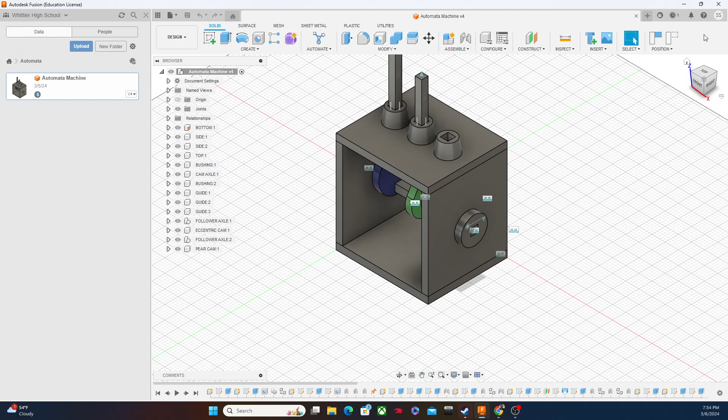Okay guys, so you have your automata all done, hopefully. Once you're done, if you need to rotate it on its own, here's how you do it: go to joints and find the one with the revolute that you did, right click and say animate joint relationships, and it should run like that.

Okay, now let's go ahead and stop that. I think you just right click here and say cancel.

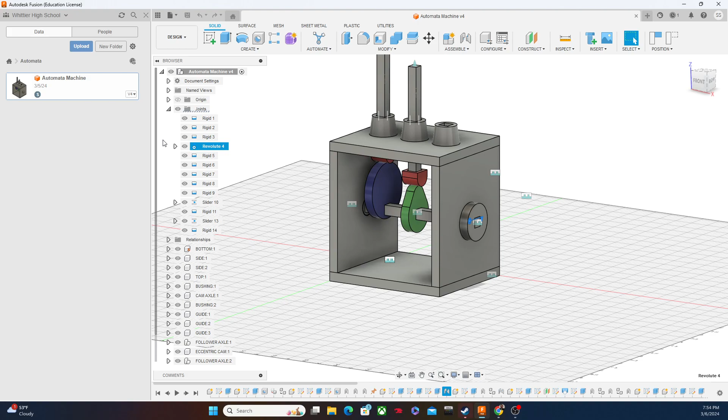We're gonna make this handle, and we're gonna make a bushing as well. Technically they're both the same, right? They're both bushings, but we're going to make one handle and one bushing. Also, you don't have to have a hole right here for the wood—you see the hole right here? You do have to have a hole, but it doesn't need to show. So you could actually cap this off so you don't see the wood, if you want it a little nicer, which is kind of cool.

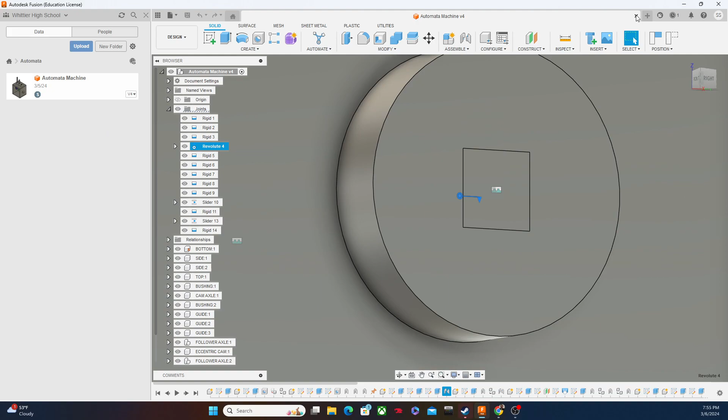So I'm going to go ahead and close out of here, and we can build it on our own over here, and I'll give you the main dimensions. The first thing you want to do is go to design and click design—oh, we're actually in one right now, I just noticed. Go ahead and start somewhere.

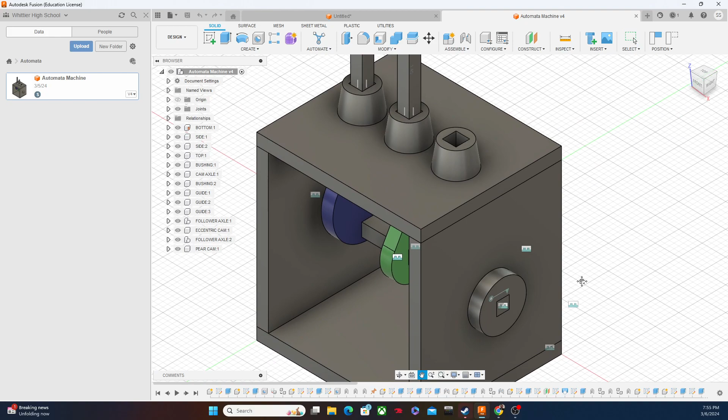Let's say here. The cool thing is that this, which is just a boring circle, could be anything. It could be a heart, a hexagon, a triangle, a logo like a Nike swoosh shape, whatever. In fact the Nike swoosh would be cool because it goes like this, and you can put a handle coming out one side that you're twisting. I don't know, but what I'm saying is it could be a face of a character, whatever you want.

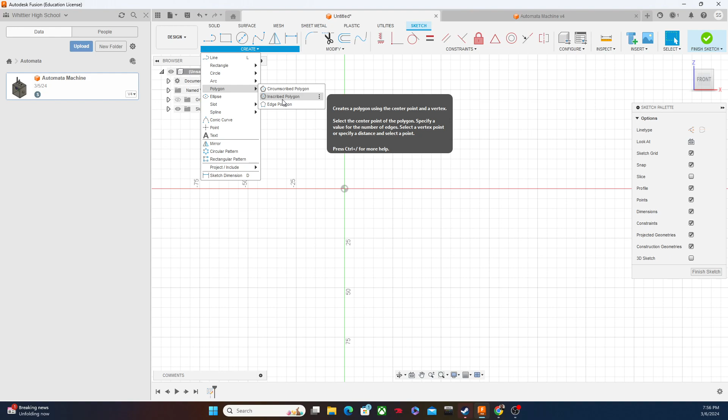Basically, however you do the outside—I'll just do a polygon for now, so that's really easy. I think this is the one I want. I'll just click here, and there we go. I'll do a six-sided one for now.

Make sure the size is generally the size you're looking for. Right now I'm going to push enter because I'm in millimeters, so let's get that converted over, since this assignment we're mostly working on inches. So let's click that and go to inches.

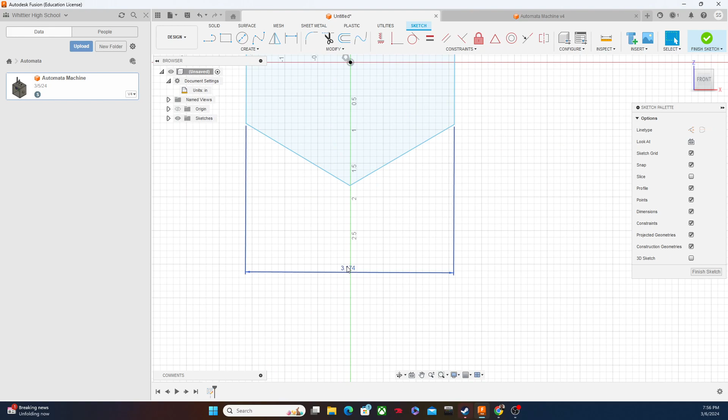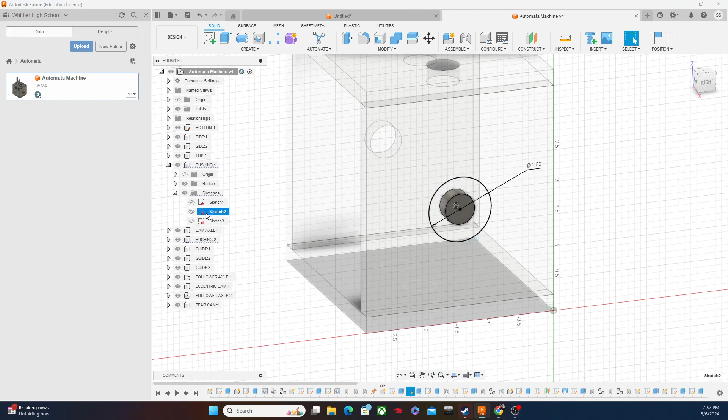And 3 inches is pretty big. You got to remember, I don't recall the exact size, but we can probably look at it right here—bushing, let's look at the sketches. Let's look at the first sketch. Oh, that's the inside, so let's cancel that. I think it was the second sketch. Yes, there we go—it's only 1 inch, so it's not very big. Mine's probably way too big if you look at the scale, you know what I mean? So I'd say let's keep it like 1 inch or 1.2 inches or something like that.

Let's keep it realistic here, but you can go a little bigger. You know how big it is—just look at this whole side and how big that is. I don't remember exactly, but I think it was 3 inches or 2.75 inches. So keep it to 2 inches or so.

But remember, 3 inches is going to be almost that whole side—so it might be this whole side. This is 1 inch; if you have 3 inches, it'd be like one here, one here, one here, right? So it'd almost take up the whole thing at 3 inches. So try to keep it to 2.5 max. Mine's 1.2 inches, a little bit bigger than that one. So let's just go ahead and finish.

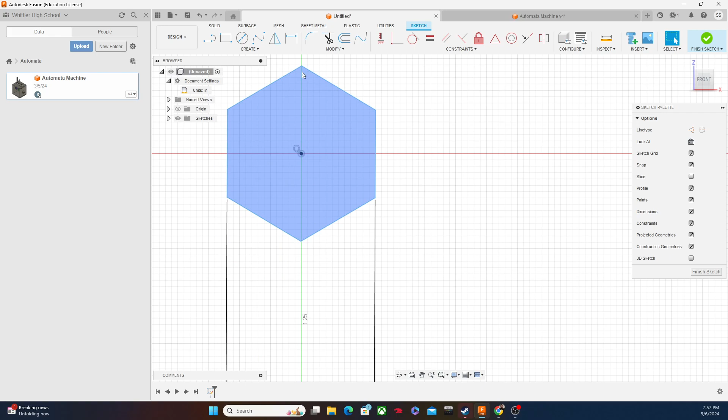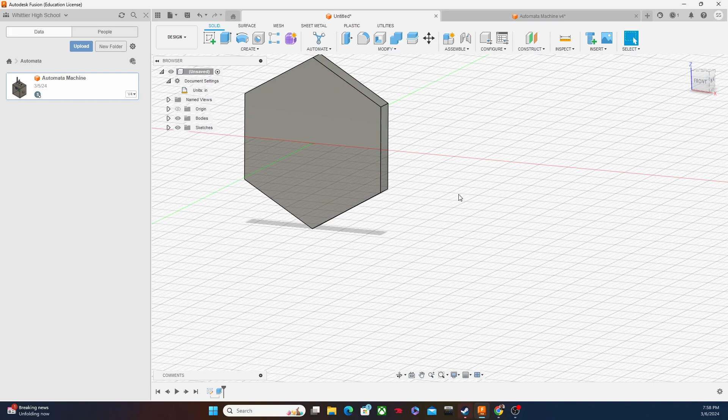Let's say you did this cool drawing and you're extruding it out—you don't want to extrude it out much more than 0.25. In fact I'm probably only going to do like 0.15; I don't like to waste a bunch of plastic if I don't need it. On this side—this is important right here—on the opposite side, let's do a sketch. And this is the part... that is not what I wanted to do. Sketch.

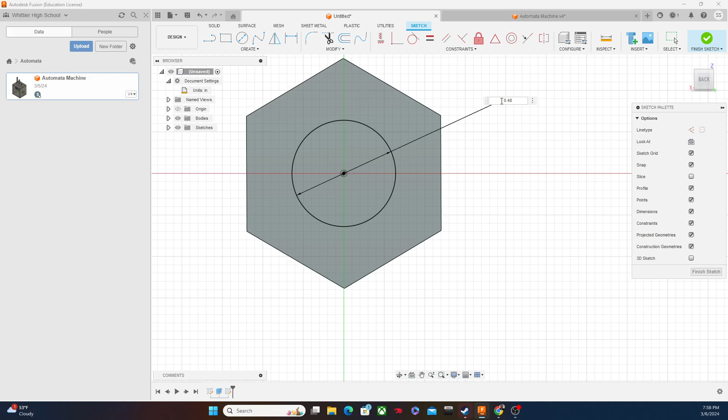There we go. Let's click a circle right in the center. This is the important one that's going to insert in the hole, and I'll show you that in a minute. We probably want it a little bit smaller than a half inch, so 0.48 inches. Let's finish it, and I'll show you what it looks like and why we're going to do it. And extrude.

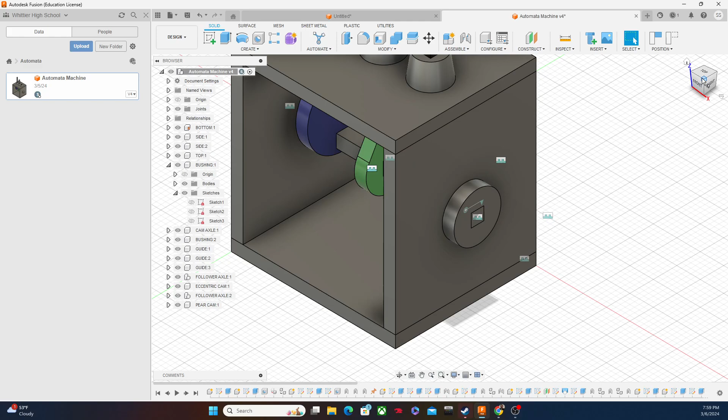And this one can be a quarter inch. In fact, you kind of want it to be. That is going to, a plug, it's going to go into this hole right here. You see that big hole right here? It's going to go into that.

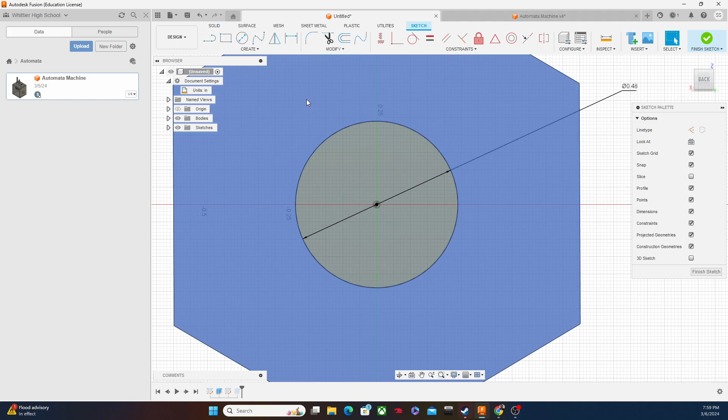But we do need that square in the middle. So actually, this is a good idea. We can go here, and if you're wondering how I got there, I just double clicked on my sketch down here, the one I just did, and it opens it back up. And I'm going to do the center rectangle right here.

Let's get that dimension just right. That hole is a 0.25 stick. So it's 0.25 is that stick, but we should add some. I'll be honest, add at least 0.02, at least add that.

You might want to add more, to be honest, because you're going to be fighting it. It is annoying when it doesn't fit. You're going to be sanding your stick and trying to get it to fit. So I'm going to do 0.25 plus 0.03 as well over here.

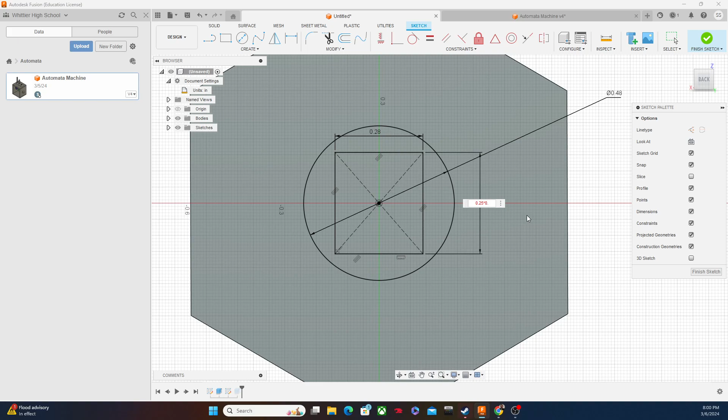I must have messed something up. I'm just going to type in 0.28 for now. There we go. And then we're going to say finish.

And notice it did not fix it, right? So let me double click on my extrude. And it's asking me to select it. No, just that - see, so I just exited out of that.

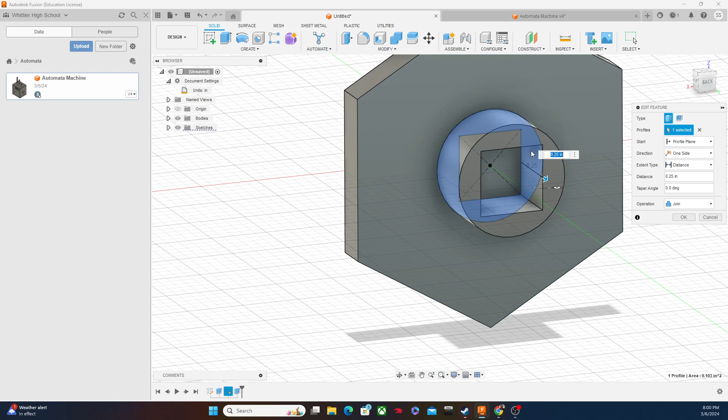And it had 2 selected. So what it did is it had both those selected automatically. So I said, no, I do not want that. I only want the outside. And put OK. And see, now you have this cool little plug, right?

And it's going to go in the end. It's going to be flush. You're not going to see the stick. It will be rotating, but hey, you can make it look fun - something cool that's rotating there. And the stick right here is just going to stick right in there.

You can add a little bit of glue if you don't want it to come out anymore. But don't do that until the very, very end when everything works great. And even then, I don't recommend that too much. I'd rather just make it a tight fit, because if anything breaks, you want to be able to remove this plug.

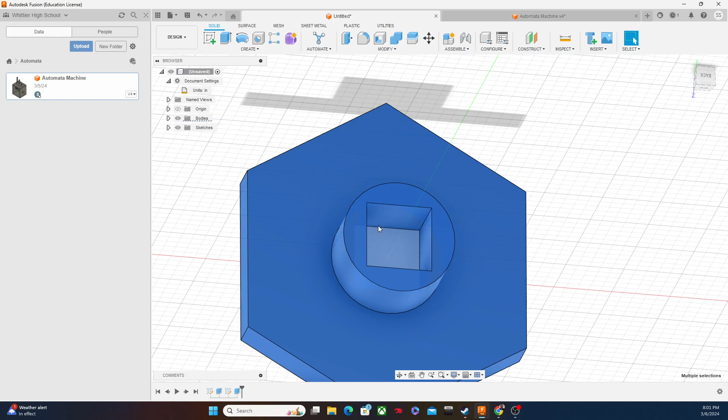Okay, so let's go back to the home position. And remember, if you need to take this out and 3D print it, you click here and say 3D print. It's going to ask you what you want - you click it, it'll turn blue. Then we're going to say refinement, go to high. And then uncheck this, then do 3D print utility, uncheck it, and just push OK.

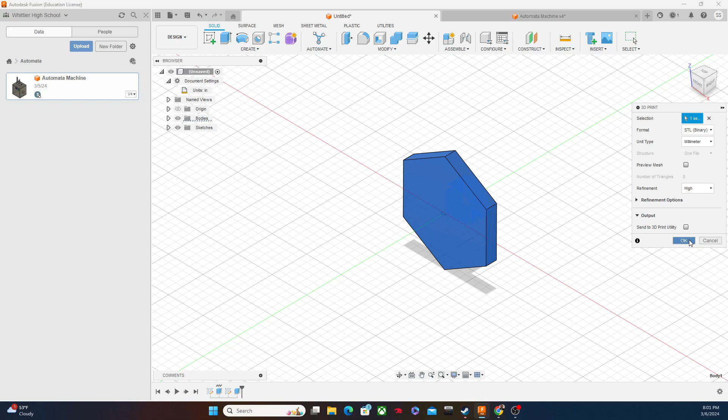And then it's going to download, you name it, and just say where you want to put it. You want to save to your computer, so click here and save it somewhere like your desktop or your downloads folder. Alright, so now let's do the handle.

Now the handle could be cool looking. Let's do sketch. And let's do here again. Let's put the handle over here. And again, you could do a hexagon, you could do whatever shape you want.

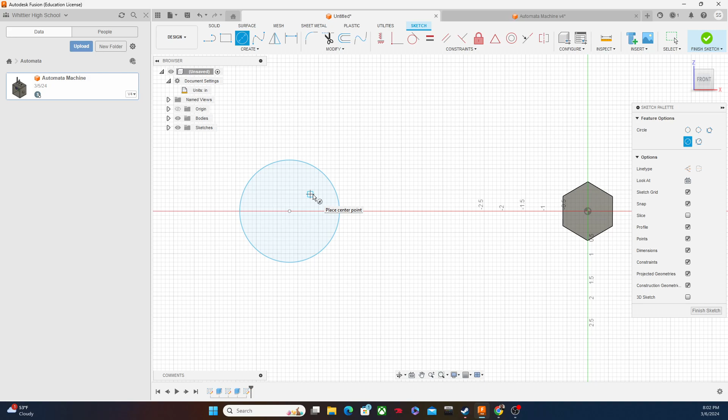I'm going to do - actually I'll do something cool, something more, that's kind of boring. But I'll do the slot. There's a slot somewhere - there it is, slot. There we go, let's try this.

Why is that not moving? What the? Slot, right here. I guess it goes wherever you clicked, but here we go.

And make sure you dimension it though - dimension how long this is, because we want to know how long it is from here to here. Let's try that again. And this is 1 inch. Remember I said, this is going to be center to center.

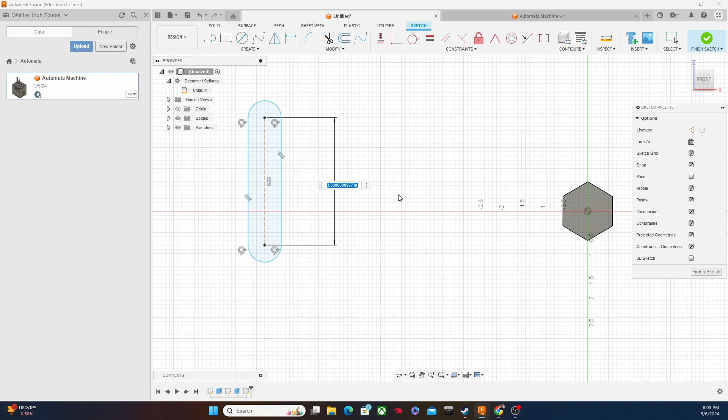So actually you want this like 1 inch, 1.2 inches, okay? Because this right here, I'm going to put the handle right here. This is 1 inch all the way across, but mine's going to go here and out this way. And there's going to be a stick coming out that I can grab.

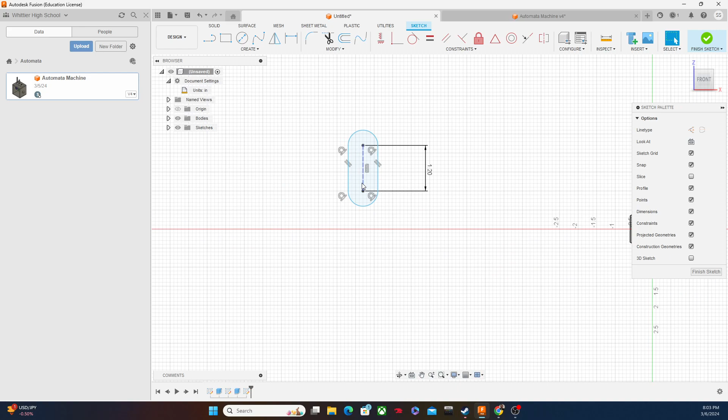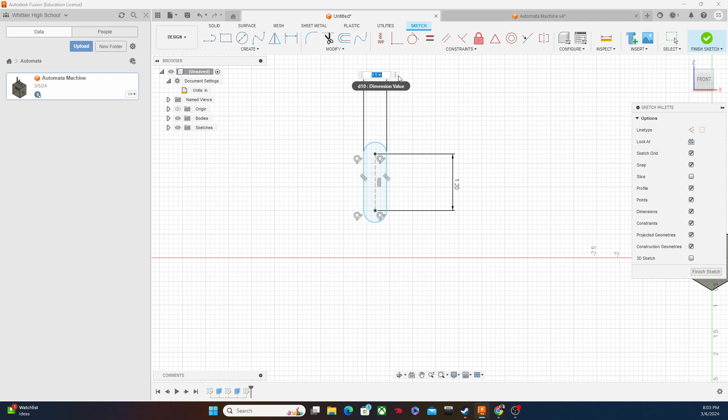So do that. Now, to be honest, the reason this is not black is because I didn't say how thick it's going to be. So let's click from here to here, and let's make it 0.5. There we go. Maybe I need more than that. Actually, 0.5 might work. That's going to be a nice clean look.

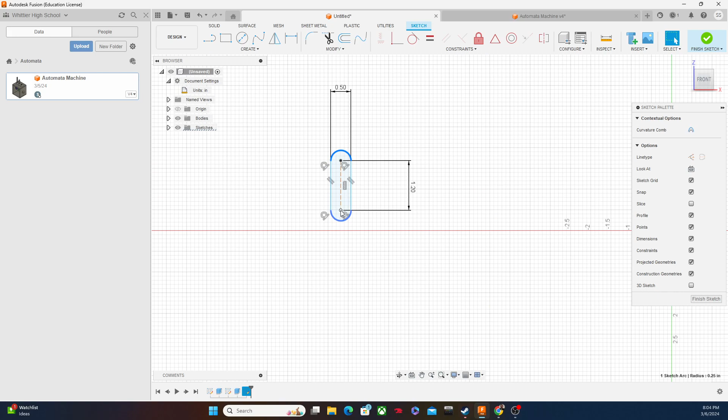And the reason it's still not black is because I didn't say where this was. So technically what we could do is hide the other object right here. Actually, I didn't do a new component, so it's probably bad practice, but it doesn't really matter.

So let's go finish, and let's extrude that. We're going to extrude a very small amount, 0.15. You could probably go as small as 0.1. And there we go. Then we're going to say sketch on here.

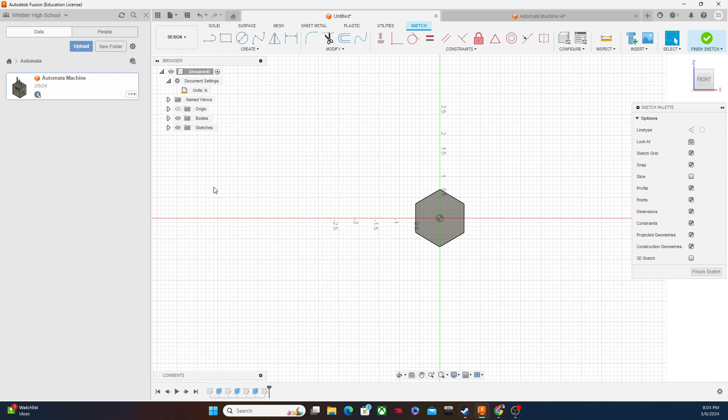Control Z. It thinks I clicked on the plane. I'm trying to click on that. So sketch right here. I think it's clicked here. Hopefully that's where it knew I clicked. Let's see, finish. Okay, right there. I'll click it first, then click sketch. There we go, that's what it should have done.

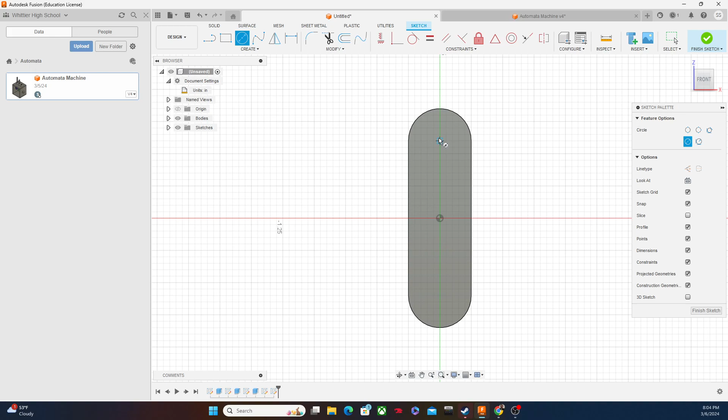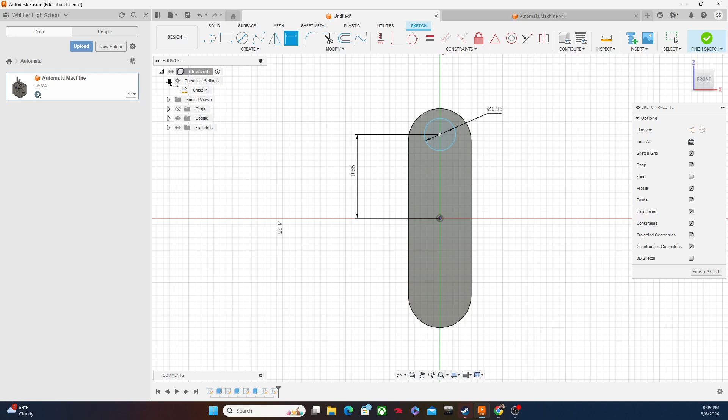All right, now let's click this right in the center, and let's put a little handle, and this handle is going to be 0.25, and make sure it's a certain distance away right here. Look how clean that number is, almost 0.65, so 0.65. I'll just put a nice clean number and push finish, and then we're going to extrude that.

And whatever you think looks nice for a handle, I guess. I'll say something like that. That's 0.45, so I'll just put 0.5 then. There we go, that looks like a cool handle.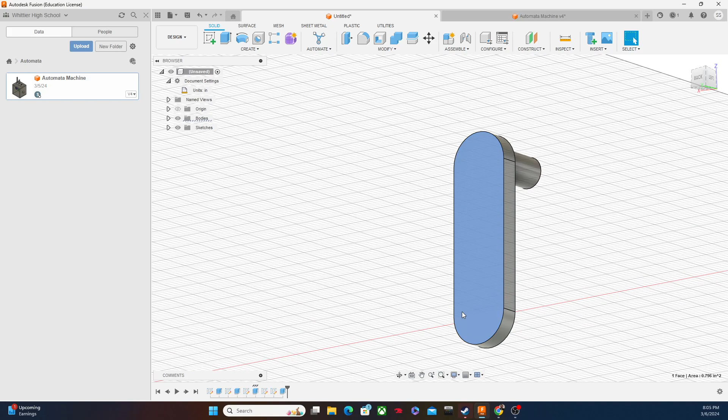Now on the other side, right here, I'm going to see if I can select it. There we go. Oh no. There we go, so it's blue. Click sketch, and it should rotate around. So we should be drawing here, by the way. Let me just double check. Yes, so I want to make sure it didn't rotate on me.

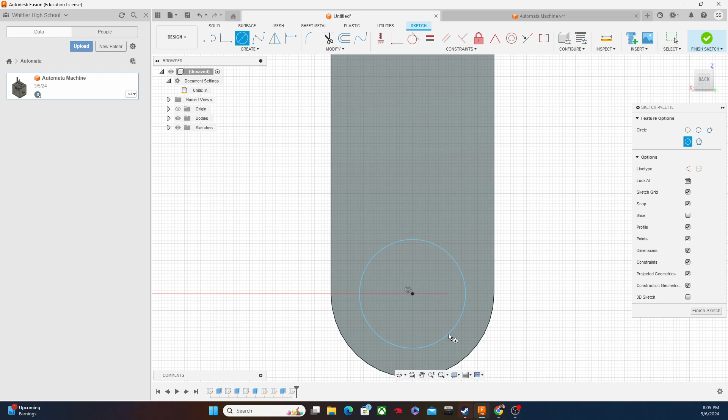I'm going to draw right here. So sketch. And this is the part we're going to insert in that hole. Remember, the hole is 0.5 - you're going to use a 1/2 inch drill. But this should be a little smaller, like 0.48, so that you're not fighting it. That's why I made this whole thing a 1/2 inch, because I knew this would fit just nicely there.

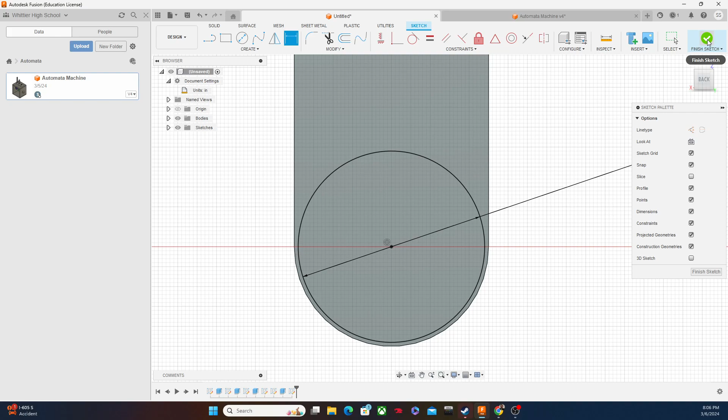And that's pretty much good, that looks clean. Otherwise, if it doesn't look clean like this, you're going to need to do something to try to center it, like do a little bit of math here and say from here to here and maybe here or something. So I'm going to say go ahead and finish, and then I'm going to extrude out.

And this is one that only goes a 1/4 inch, 0.25. Oh, I forgot this, I forgot the square again. So let's just go ahead and edit that, and let's put that square in real quick. We're going to use the center square or center rectangle, and click right here in the center.

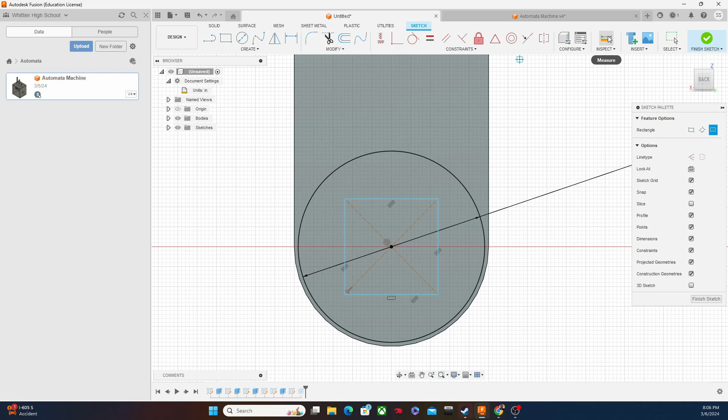Click this, and remember this one is where the stick has to fit through, so I need a little bit bigger than the stick. I think I said 0.27 was good, or 0.28 - 0.27 is fine. And there we go, say finish.

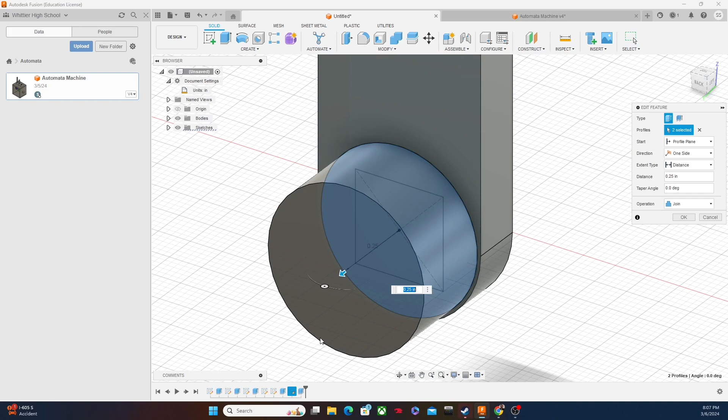And I think we have to double click on this, and we X out here, and we say this only. And that's it, now we have a handle. It's got a cap. If you want the hole to come through, you can - I think this looks cooler. But you will need to glue it so it stays in there, it's going to fall out as people twist and pull on it.

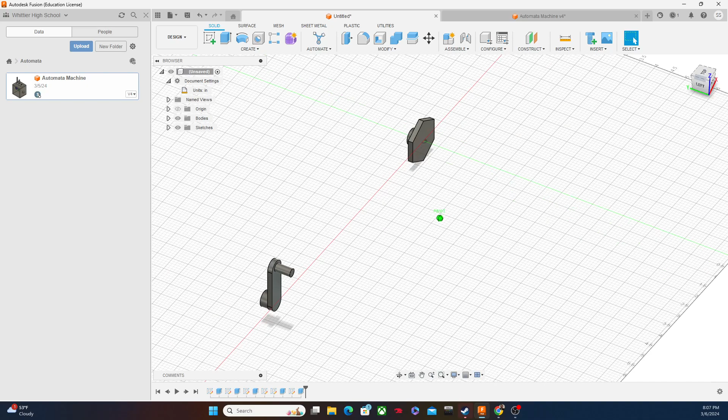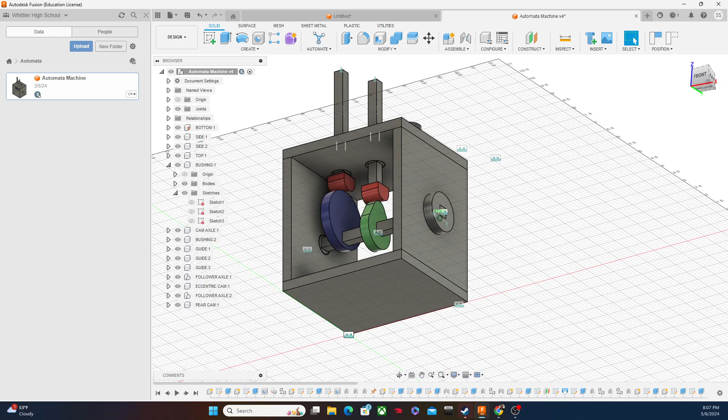And this other one is for the other side, which is going to go into - so the handle will go on this side, and that will go on their side. So go ahead and design that. If you want to design these a little bit prettier, you can. These just are going to have a big hole so that these sticks can go up and down, and that's it. If you want to design any other custom parts, you can as well. But that's today's assignment, is drawing all your custom parts for your box, and that's it.